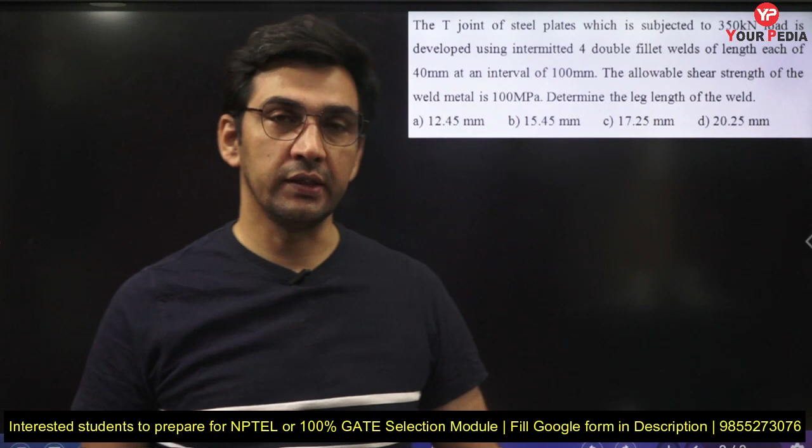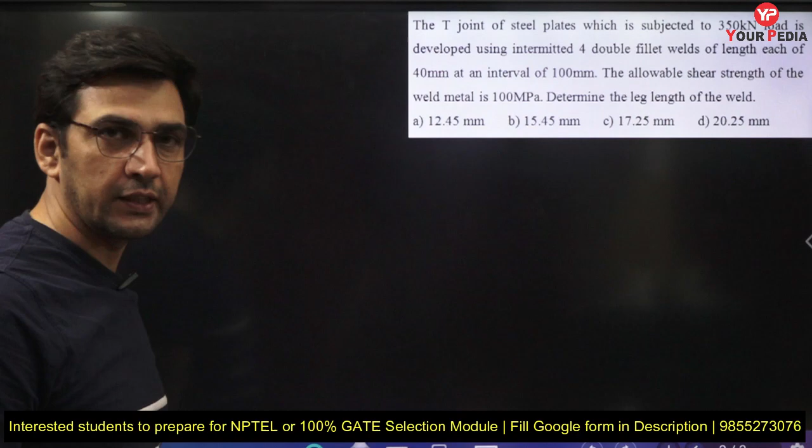This question I have taken from the machine design section, and as you can see, this is related to the design of a welded joint. Just go through this question, try it yourself, see what mistake you are committing, then you will realize it better. Then see the explanation part.

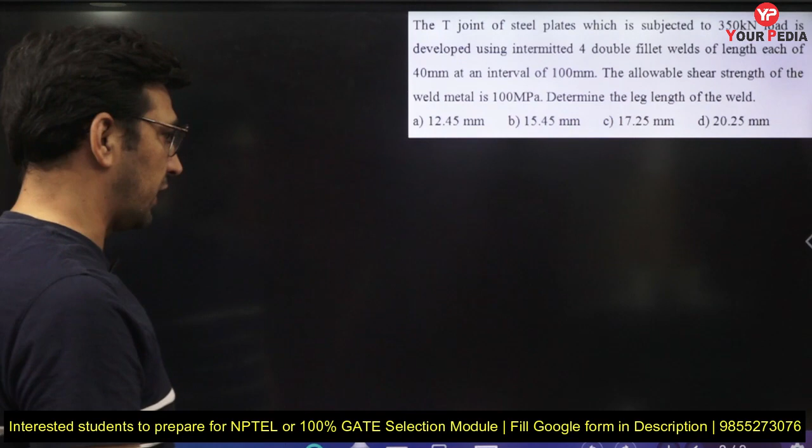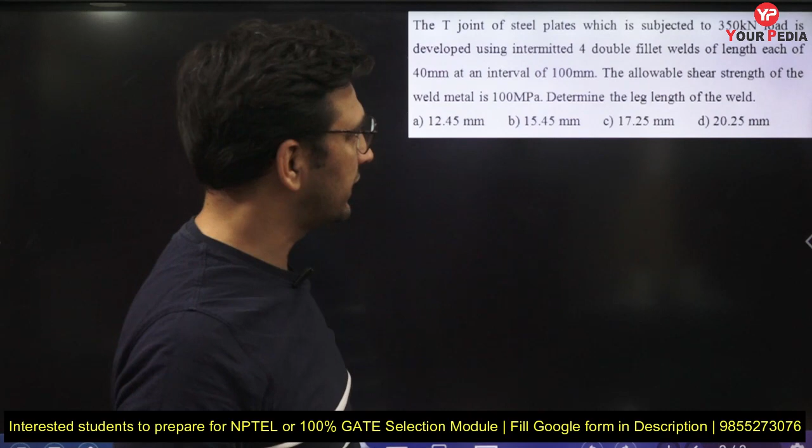Here you have been given a T joint. You have two plates joined in the form of a T section, and they have been welded, with details given to you. So the same information I have presented in this way. I have drawn the figure, and now I will explain with the help of that figure.

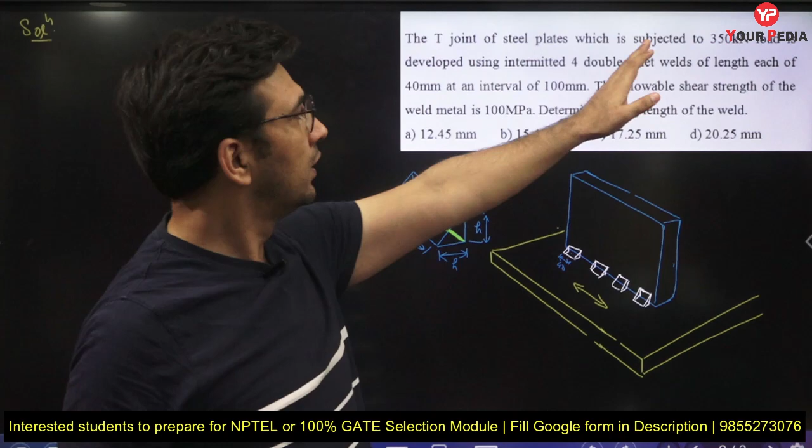It says a T joint of steel plates. So I took two steel plates in a T shape configuration, which is subjected to a 350 kilonewton load developed using... how that load is applied is not mentioned. It uses 4 intermittent double fillet welds of given length each.

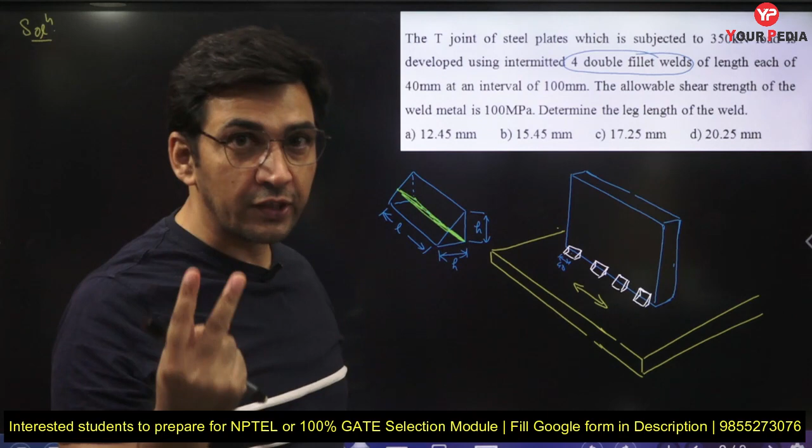This line you have to read carefully. He's saying 4 double fillet welds. That means these are not just 4 fillet welds, these are 4 double fillet welds. What does it mean? For example, if you are joining these two plates this way in the form of T section...

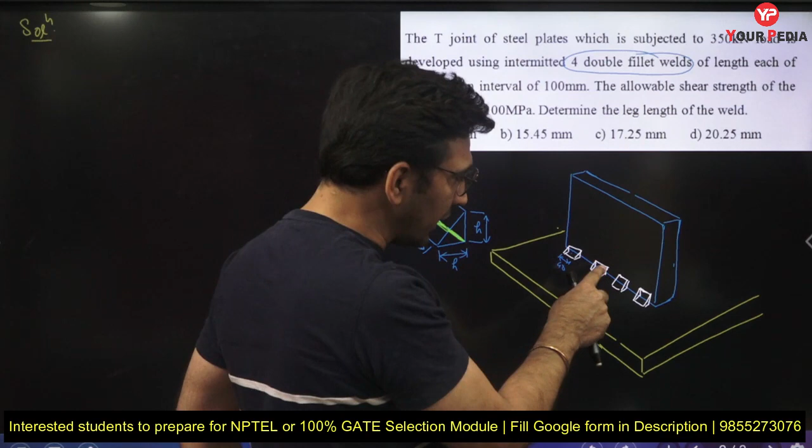If you have to weld it, one weld you put over here and another on the other side. So you are having 4 welds on this side, and similarly 4 similar welds on the other side. So how many sets? You have a total of 4 sets, 4 double welds.

One double weld over here, one over here, one over here, one over here - that means one here, another here, one here, another here. So in total you have 8 welds used to join these two plates, and they are fillet welds.

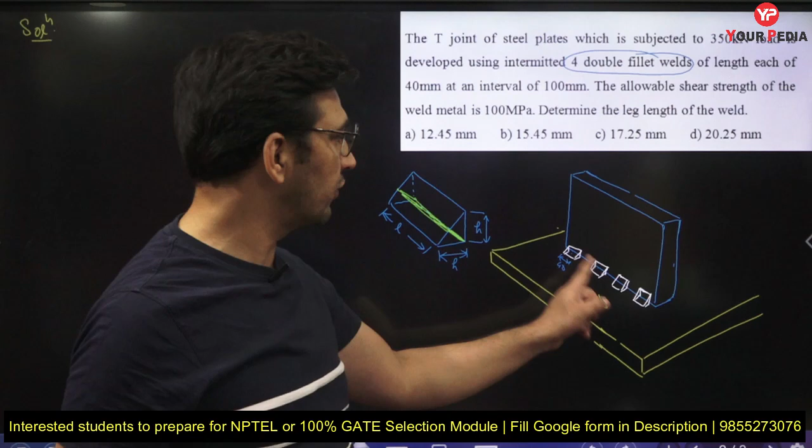They will look like this way, and at an interval of 100 mm - whether that information is relevant for us or not, we will see it. The allowable shear strength of the weld material is given.

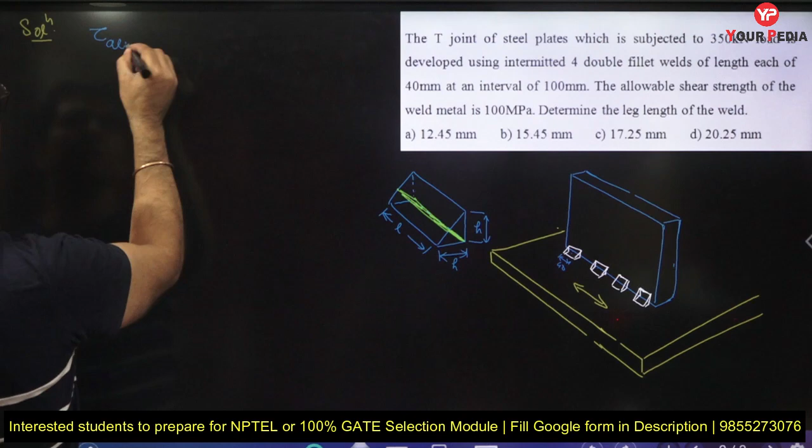The allowable shear strength of the weld material given to you is 100 megapascal. And he is asking us to calculate the leg length of that fillet weld.

Leg length means - I have taken one of the fillet welds and shown it here. This is the fillet weld, and this is the leg length, and this is the length of the weld, of each weld, which is 40 mm as given. Such welds are there, total 8 in number.

So this is how the situation is. What he says now is determine the leg length H. Now if you look here, he has nowhere mentioned the loading, type of loading, type of joint. He has simply given that I have formed a T section and joined it with the help of fillet welds.

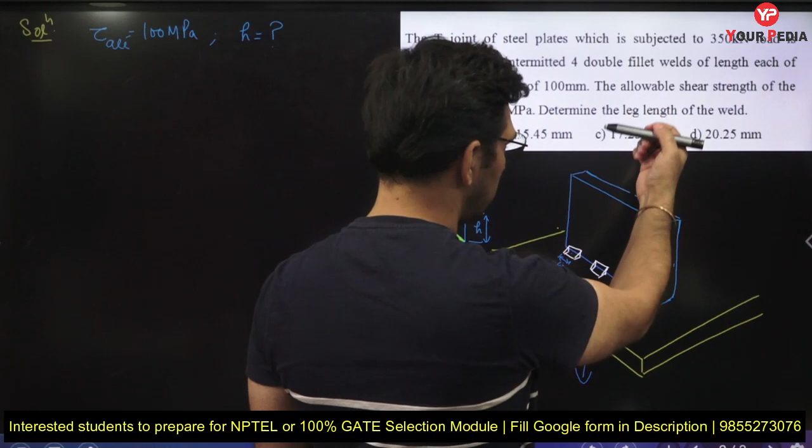Some of you may say okay, I can apply load this way. Some of you may say no, you have not applied load this way - you will say I have applied it on the bottom plate this way and on this plate this way. You can think of it as uniformly distributed from top to bottom, applying this way.

So if you are applying the load this way, then this joint will become a parallel fillet joint or longitudinal fillet welded joint. What does that mean? That means the force applied is parallel to the direction of welding. Where is the direction of welding? Yeah, this is the direction of welding.

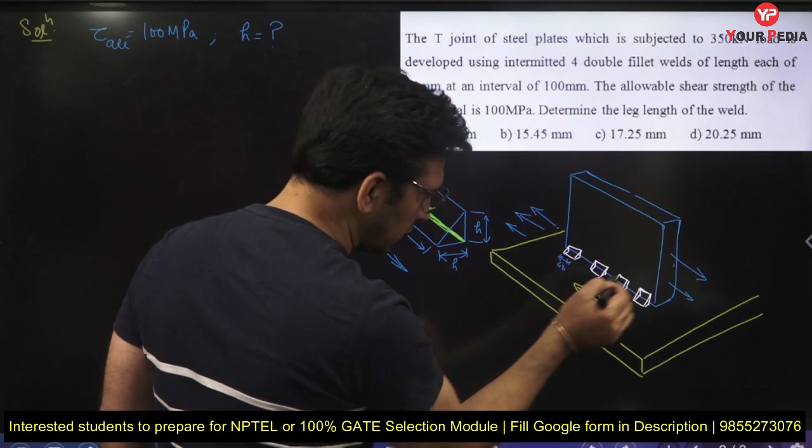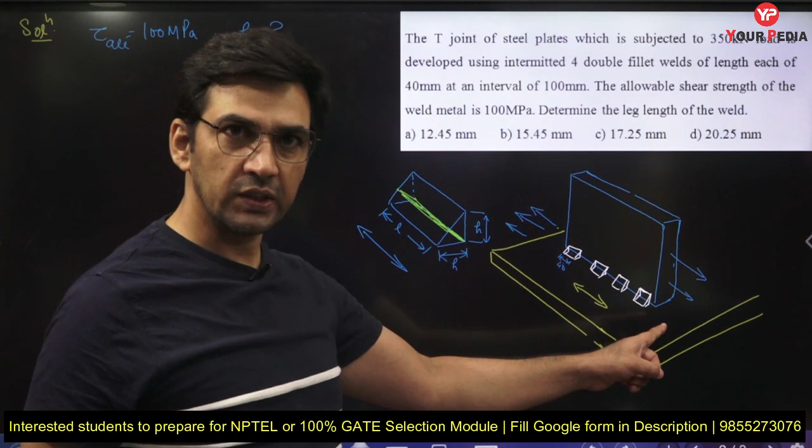So the direction of welding is this way. So if force is parallel to the direction of welding, we say this is a parallel fillet weld or longitudinal fillet weld. And in this case, all the welds in such a situation will be subjected to pure shear only.

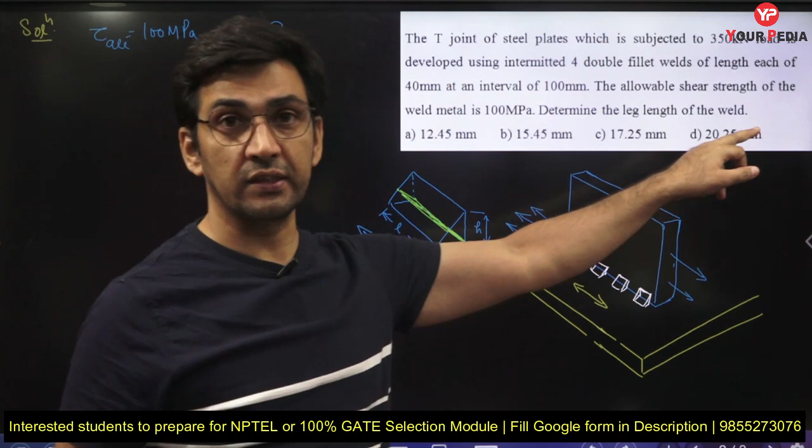That means this vertical face will be subjected to shear, as well as the bottom face of the weld will also be subjected to pure shear. So this weld is purely in shear, and the design is simply based upon shear only. In that case I will have no trouble, because he has given the allowable shear strength for that weld material. I have to design it based upon shear. My job is done, so no issue.

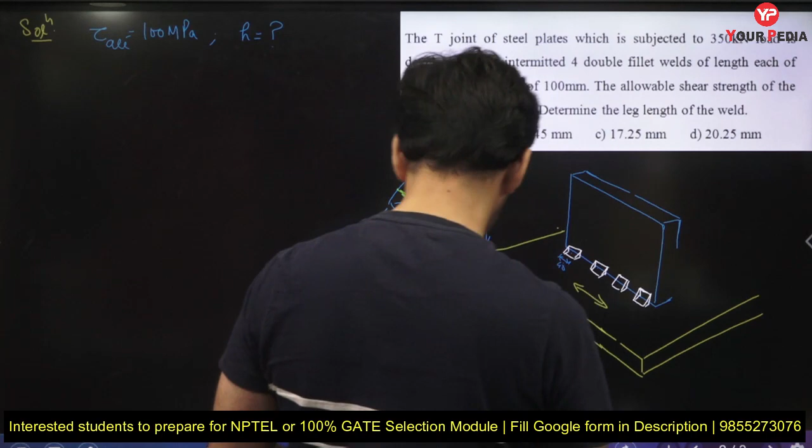Now some of you may say why you are taking this way. I will not take this way because he has not very clearly mentioned that. So if he has not clearly mentioned that, the other possible mode could be this way also.

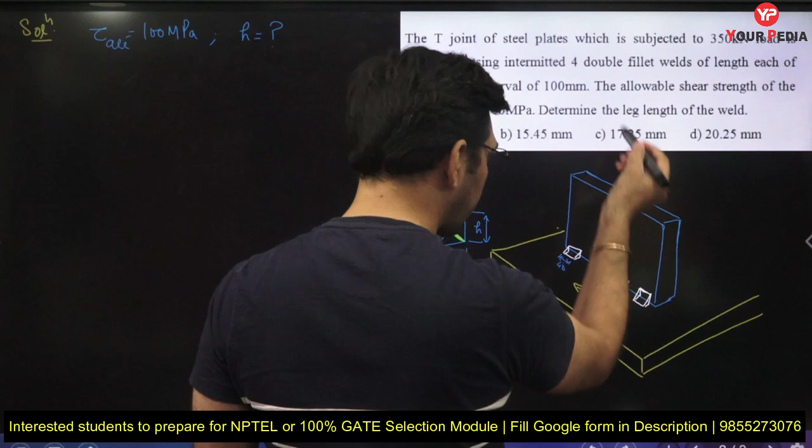You are pulling it from the top, and as a reaction force is acting on the bottom plate, then what will this become?

In this case, force is acting perpendicular to the direction of welding. Direction of welding is this one. So perpendicular to the direction of welding means a transverse fillet welded joint. All the welds are in transverse loading condition.

If that be the case, this vertical face of the weld will be subjected to shear, whereas the bottom face of the weld will be pulled down. That means a combination of shear and tension. So this kind of weld is normally a combination of tension and shear.

Now, to design such welds which are in transverse loading, some of you can approach through tensile, making them fail in tension, and some can say they will fail in shear. But since he has clearly given the information that the maximum allowable shear strength is this much, you have no choice but to consider that it is going to fail in shear only, because he has given no data for tension.

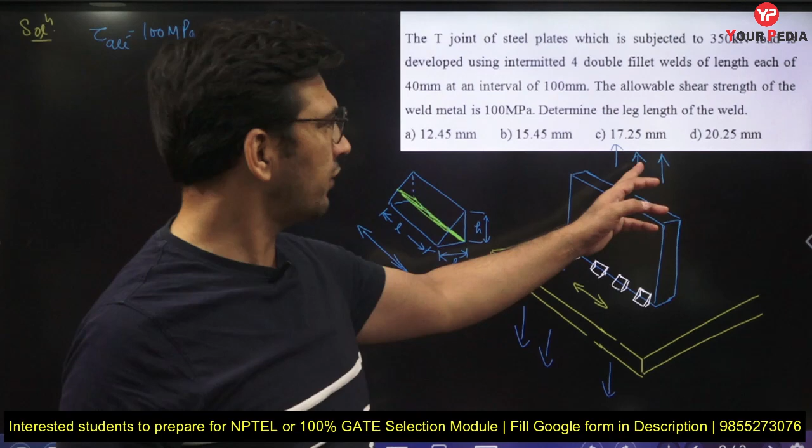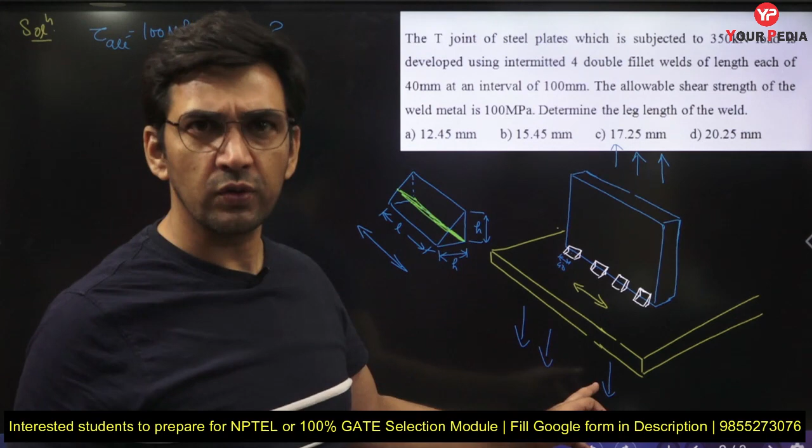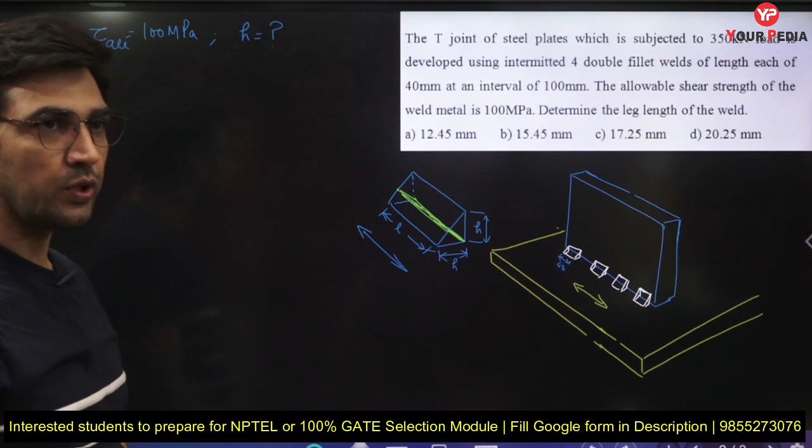So if that is the case, it is straightforward that whether it is a transverse loading case or a parallel fillet weld, in both cases it is going to fail in shear only. So it means I am not bothered how he is applying the load, because since this is going to fail in shear for both the modes, I have to write down the equation of shear in this case.

And you know, in case of fillet welds, we consider them the weakest at the throat section, and therefore if they fail in shear, they are going to fail at the throat section of the weld. And where is the throat section of the weld? Each weld is over here, this one which I have shown you. This is at 45 degrees, you know it.

If that be the case, now tell me the maximum value of the shear stress that is induced, and that will be at the throat section of the weld. You will say: the force that you are applying divided by the total throat area of all the welds.

All the welds resisting that force. Resisting which force? P. Because P is the resisting force.

And what is the total throat area? You will say if I am applying force P, what is the throat area of one weld? This is T, throat thickness. And what is the length of the throat? That will be equal to the length of the weld only. So the throat area of one weld is TL.

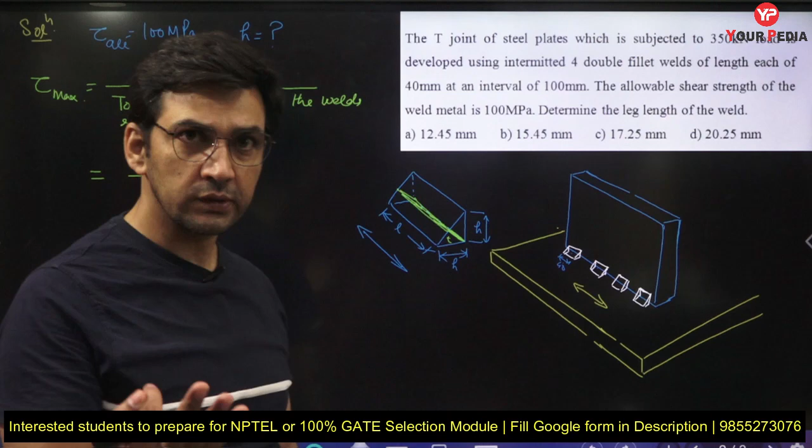How many such throats are in total which are resisting this force? There are total 8 throats. That means since there are 8 welds, 8 throats are going to resist, so this is the total throat area which is going to resist this force.

It means I can write P divided by, now writing T in terms of H, you already know that it is 0.707 H into L. If that be the case, now it becomes simple.

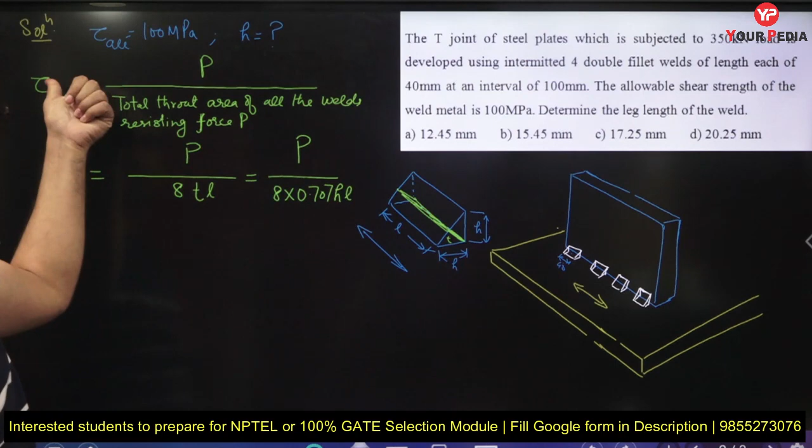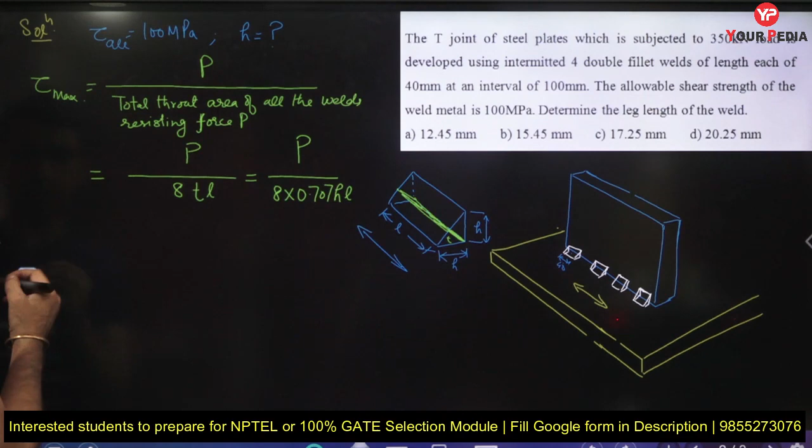Now he is saying that if I am applying force this much, 350 kilonewton, and length is this much, and the allowable value of shear stress for the weld material is this much, then how much is going to be the leg length? So simply it implies that if I take the allowable value as 100 megapascal in Newton per mm square, I need to correct the units.

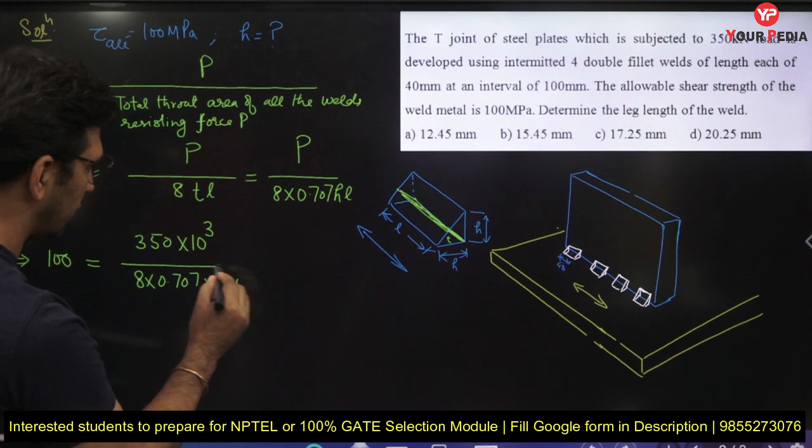The load that you are applying is in kilonewton, so convert it into Newton, and over there I want to find out 0.707H. The length of each weld is given as 40 mm, so interval is not relevant for me, whatever the interval is — we are assuming that he is placing them at uniform interval. So from here I can find out the result.

So I think you may have found it out. Let me just check what was the answer. So somewhere, if you can calculate, you can just see it. Okay, so H is going to be 15.45. So this is going to be the leg length.

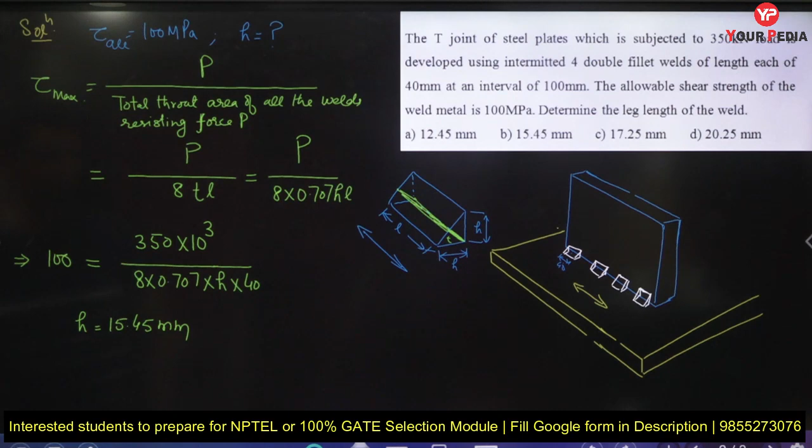So this is how you are going to approach this particular problem. The only point you have to take note of in this problem is to interpret the information correctly. If you can interpret it correctly, the rest is just basic understanding of this topic, which you can utilize to solve this problem. I hope you found this problem relevant enough.